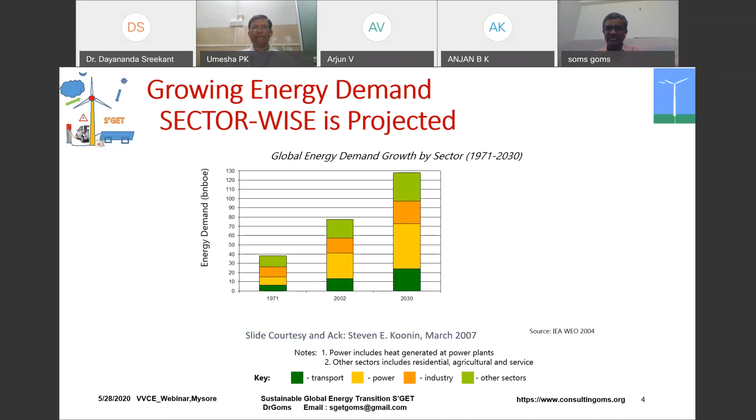Just remember, the CO2 left by your grandfather is still remaining in the air, because the half-life of CO2 is 120 to 150 years. So what we emit will live even after our death. So we have to leave emissions as low as possible.

What are the sources of emission? See the percentage of sources of emission: electricity and heating is a major contributor, 24.6% of emissions. It's an excellent book by Soli Arceivala, who was a world-renowned person, 'Green Technologies for a Better Future,' which vividly covers how we can have green technologies.

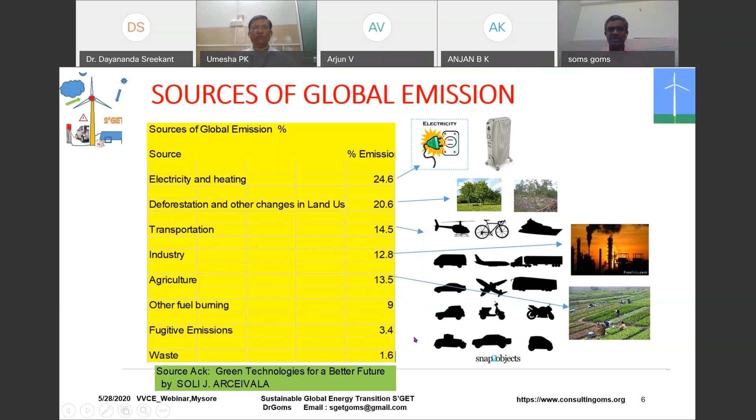Let's look at some emission factors of fossil fuels. Lignite has the highest CO2 emission per megawatt of power, 1.3 tons per megawatt of power from lignite power plants. Coal is 1.05 and so on. Even if you burn wood, it will give you 0.17 kg CO2 per kg of wood burnt.

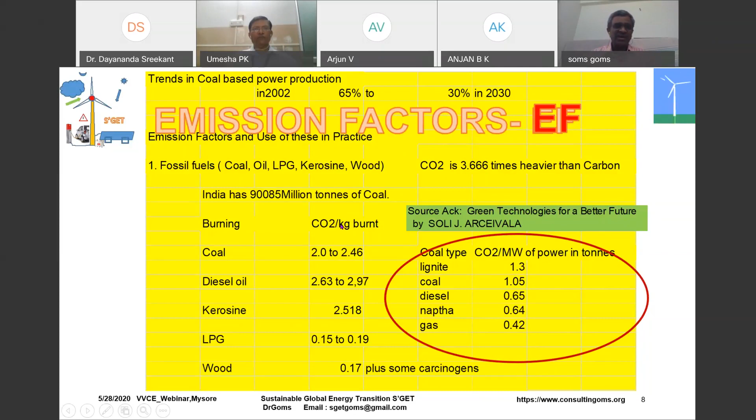Now, how we can reduce emissions: if you drive a two-wheeler, 45 grams per kilometer of CO2; three-wheeler 57; trucks 166; flights 170 to 175. Best is to go by public transportation - train, metro rails and other things - that will give a lower emission level.

Again, for industries, usage of electricity gives you almost 0.37 to 0.48 kg per kilowatt hour - for every unit you put in, the atmosphere gets 0.37 to 0.48 kg of CO2. And in the UK, it's 1 ton of CO2 emission per person per year because it's a developed country. In high income group flats it's about 1.4 tons, which is much more than in other countries - in comparison, it is 0.05.

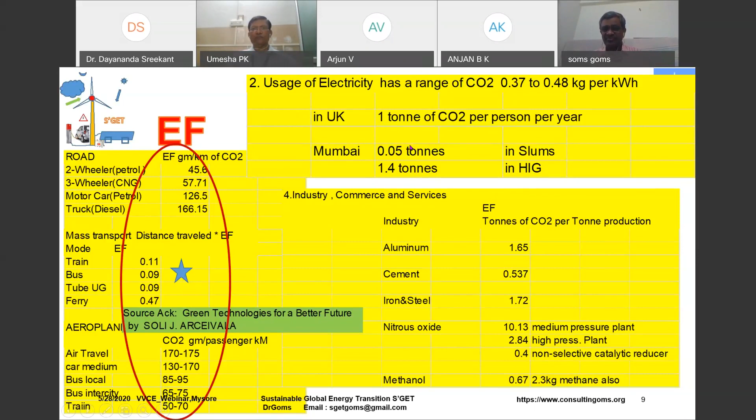Then we have the agricultural soils, bagasse, crop residuals. Everything gives a lot of emission levels.

Burning a human body releases 50 kg of CO2, but it is called carbon neutral because the wood would have consumed that amount of CO2 to produce. When plants are growing, they consume CO2 from the atmosphere and light from the sunlight. So human body burning is supposed to be neutral.

This is just to give you the emission factors. For a tall building like a 31-story building, they have analyzed a case study in this book. It gives almost 738 tons of CO2 per year with only 31 floors, from average electricity, AC flats, LPG usage, car travel, and other common items. If you multiply all this, you can estimate how much carbon dioxide will be put out by a tall building using all these facilities.

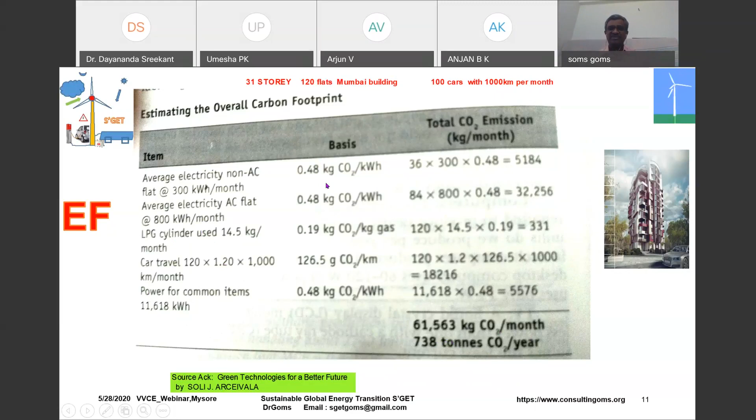That means we are enjoying a lot, right?

The Corona effect is temporary. They say pollution levels have come down by almost a 20-year low today, down to the 2000-year level, because of lower industrial activity, lower transportation, and other things.

But this curve, which is exponential, will immediately pick up after the lockdown scenario. If it is uncontrolled, it will go exponentially, emissions will be uncontrolled, and the parts per million in the atmosphere will also go uncontrolled.

So the other curves are, if we take some early decision to limit the parts per million in the atmosphere, what is the scenario? We need to follow this scenario and avoid the business-as-usual emission levels in the atmosphere.

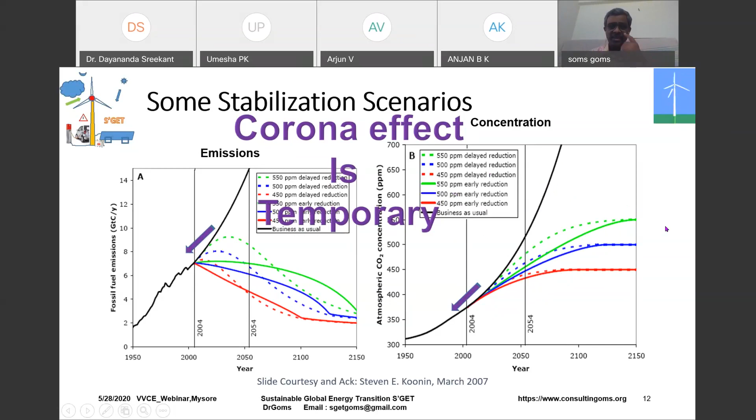Luckily, India, being a developing country, uses very low electricity per capita consumption. Compared to the world, it is 1/3 of the world average. In India, per capita electricity is about 1,170. Per capita CO2 is also lower compared to the world average, and per capita energy in ton equivalent is lower, because it is still a developing country.

We are yet to provide 35% of our people 24/7 power. Almost all villages are electrified, but maybe only with 1 or 2 lights or a couple of houses. It is not enough; 24/7 electricity should be there for all the people.

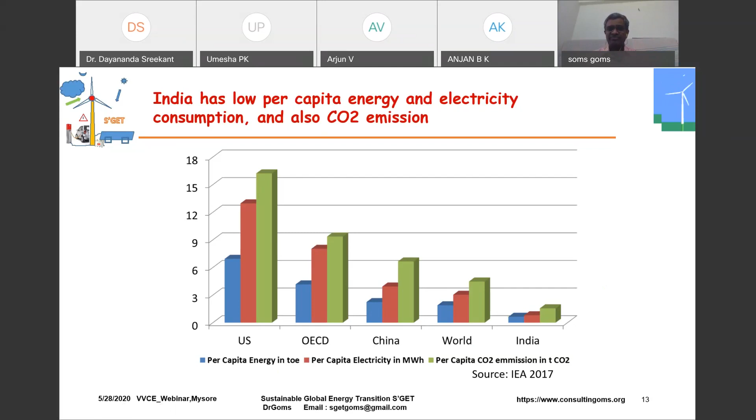In commercial energy demand, India is on the upswing because it's a developing country with a lot of industries growing day by day. Growing electricity demand comes with a lot of challenges, as it's a highly populated country. We are importing 80% of the oil we use, as fossil fuels, and even some coal is being imported. India is yet to achieve universal electricity access for everyone.

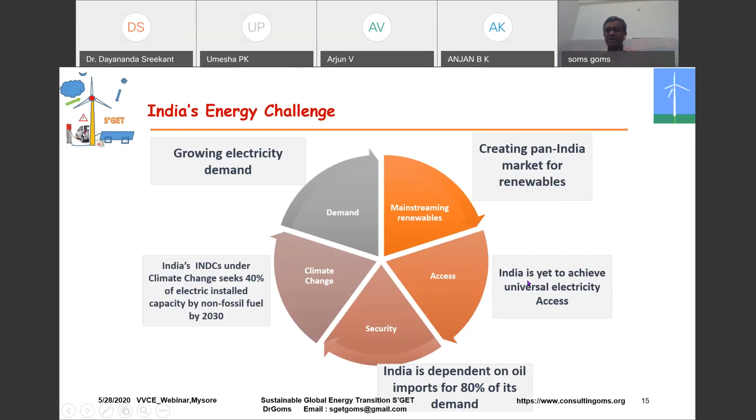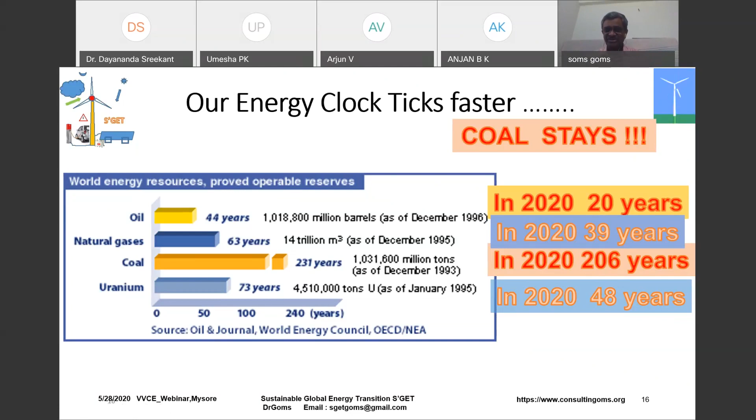It's a highly multidisciplinary area. As engineers and scientists, we will have employability and excellent opportunity, and also inclusive development even in rural areas with renewables.

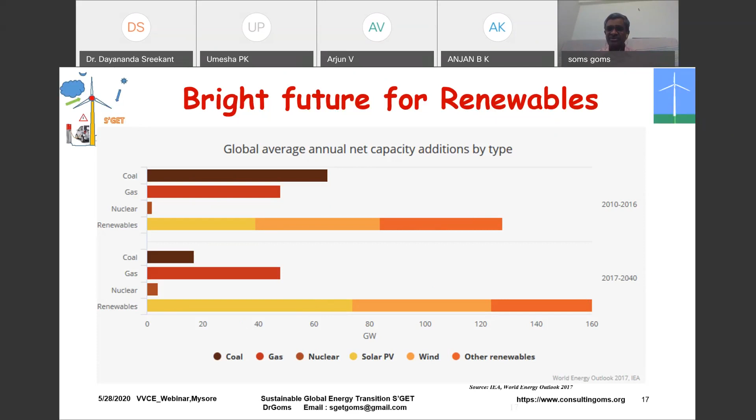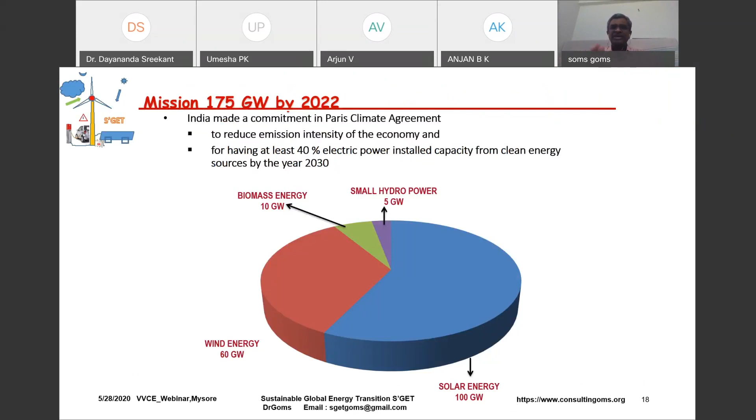This is our ambitious target set by the new government: about 175 gigawatts by 2022 has to be reached. We are almost halfway through - almost 87 gigawatts of renewables are installed in India now.

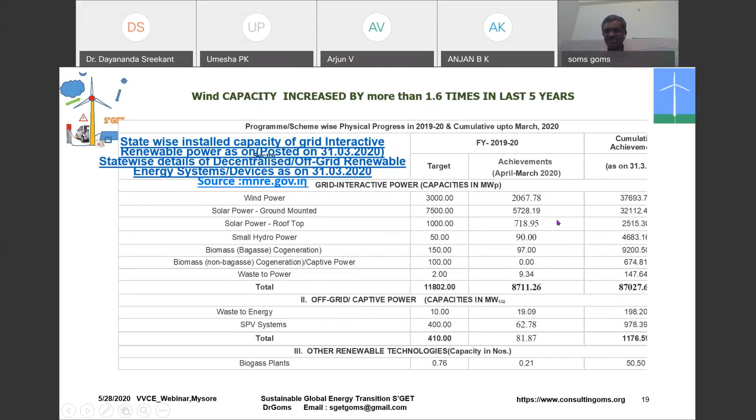So we have been making a path-breaking journey in the renewable space all over the world, not only in India. In the last 5 years, there has been tremendous growth, a compounded annual average growth of almost 15 to 20% in this sector.

Rooftops, hydro hybrids, wind-solar hybrids, large wind farms, nuclear reactors, highly focused concentrated solar power, solar mills, floating solar plants, and biomass plants, and so on.

So achievements so far: our renewable energy capacity has more than doubled. In 2014 we were about 35,000 megawatts. Now it is 87,000 megawatts today, as I showed you in the previous slide.

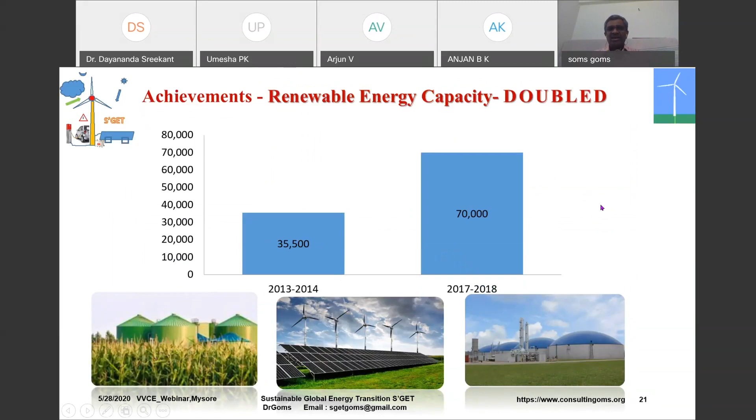We have 32,000 megawatts of solar now, and it is growing day by day. Over 100 billion units of electricity has been generated from renewables and used in day-to-day life.

We have gradually moved from 1.5% of energy penetration, not installed capacity but energy penetration level. Now in 2019, we reached 10%. We have already crossed 10% of energy from renewables in our energy mix, especially electricity.

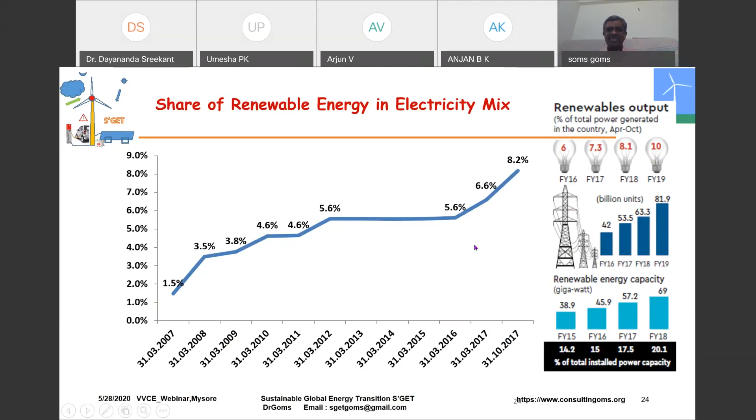Off-grid solar applications are increasing. More than 25 lakh solar pumps and several solar street lights and home lighting systems keep increasing. DC homes, where the grid is not able to penetrate, give solar DC homes; these have also increased to 16 lakhs as of now. Solar lamps about 25 lakhs, solar street lights 6.2 lakhs - this is a slightly older figure, now it will be much more.

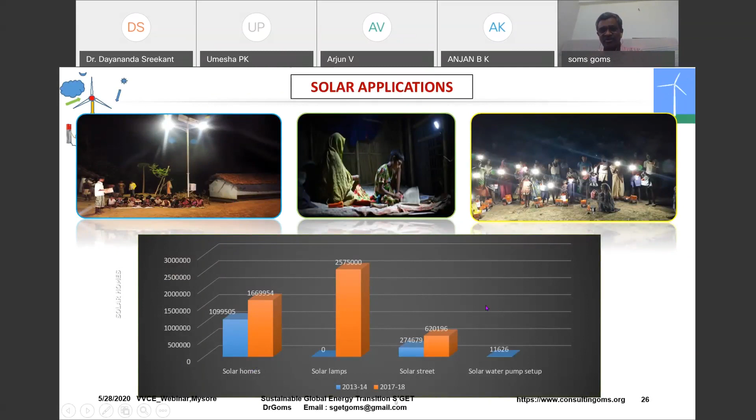The cost of solar is coming down day by day. From 17.91 rupees per unit of electricity from solar when we started in 2010, about 18 rupees, today it has come down to almost 2.44 rupees per unit - this 44 figure is old, now it's 2.41 or 2.43 rupees per unit.

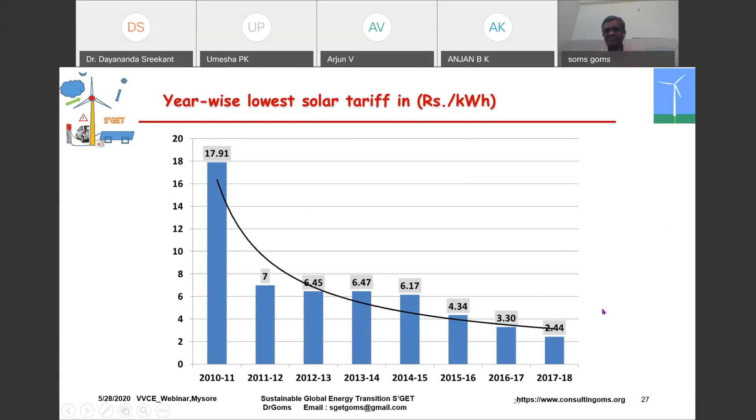There are several reasons: the government push, and several big solar parks have come up. Also the operating cost - the fuel is free. Sun is shining 300 days in a year in India.

In one of the recently attended webinars, Indo-German Energy Forum Director Tobias Winter said, in India, 365 days, somewhere or there will be sunshine. It is a golden opportunity for India to go solar in every aspect.

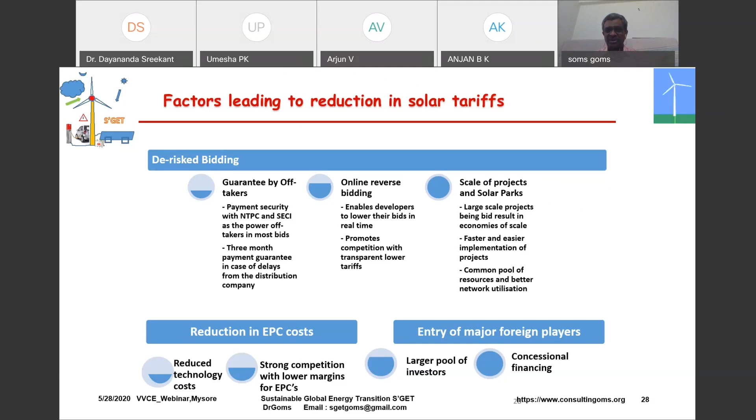Only 2% of solar energy makes the entire wind power in India. Do you believe that? Because that 2% of solar energy, differentially absorbed in the land surface, only causes the air to move from place to place - that is our wind power.

So tremendous solar energy is there. We are yet to use most of it. Most of it gets reflected and goes back to the atmosphere.

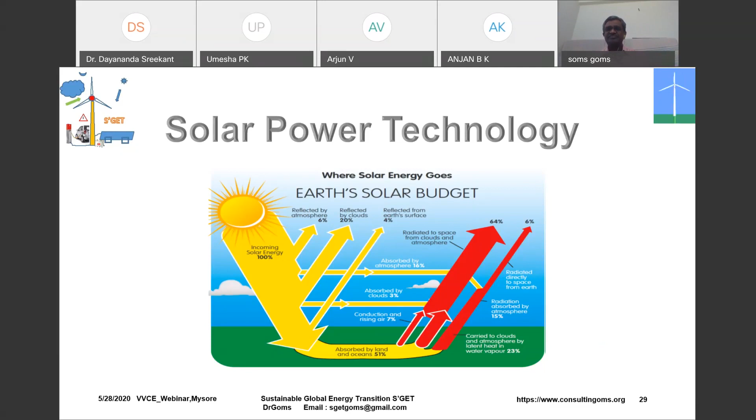The accurate measurement of solar energy has been done by NIWE during my time. The National Solar Atlas has been released with accurate measurement of direct normal irradiation - what is coming directly from the sun - global horizontal irradiation - what is reflected from clouds as well as normal radiation together - then diffused horizontal irradiation, that comes from reflected surfaces, some diffused light even though the direct light is not there. That kind of light also we have energy from.

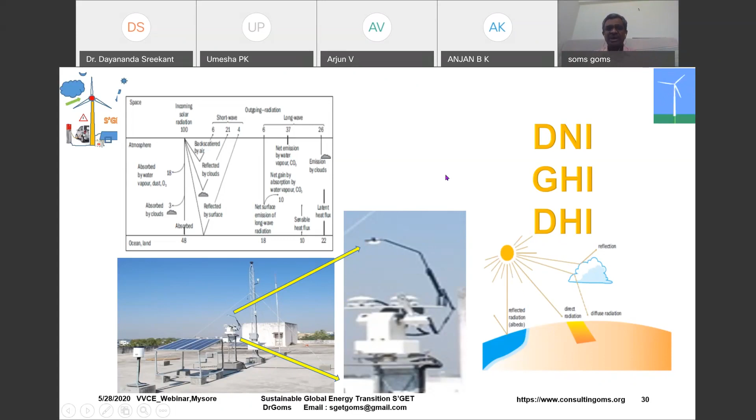This kind of measurement station, each one costing about 36 lakhs, was established - 114 stations all over India - and we released a well-validated solar map for India.

Now it is available in your mobile, in your hand. You can click the SW Urja mobile app, download it, and get all the information on wind potential and solar potential anywhere in India. This was released by NIWE, National Institute of Wind Energy, Chennai.

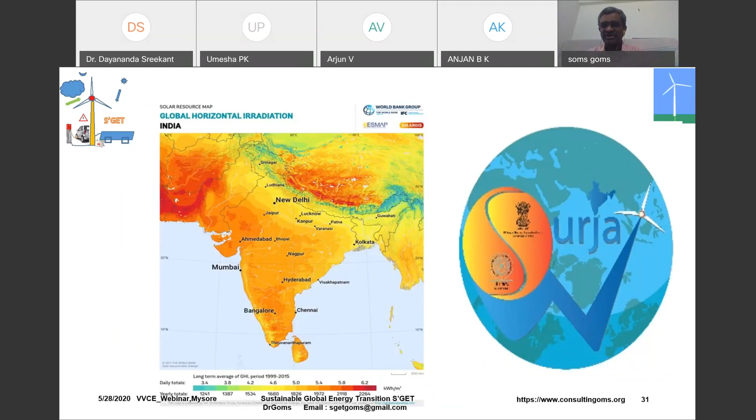Now let's briefly look at the technologies. Even though many of you know, solar photovoltaic develops electricity from sunlight, not from sun's heat. So a solar farm in Rajasthan or Tamil Nadu will be much less efficient than a solar PV plant in Ladakh, because a solar cell is an electronic PN junction.

It will work better in low temperature areas where bright light without pollution is reaching the earth. That will be possible in a dry desert like Ladakh, where temperatures are below zero all the time. This is an important point you have to know: solar photovoltaic only uses light energy to produce electricity.

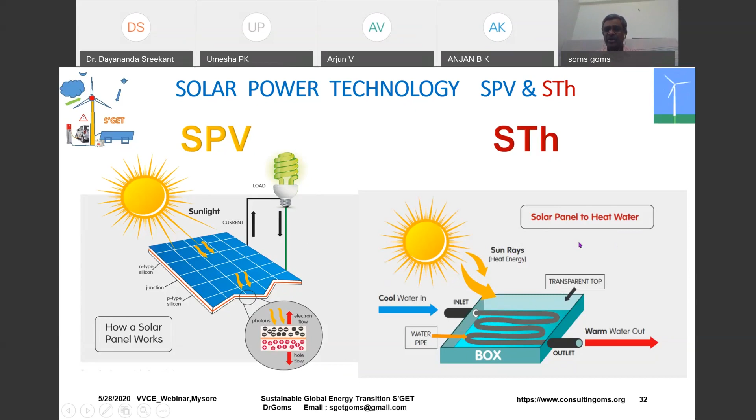Solar thermal is different - we have plenty of heat, we are a tropical country. Bangalore was, I think, the first city to mandate solar panels to heat water as mandatory for building approvals.

What other things can you do with solar thermal? You can make a parabolic reflector concentrated on a single pipe, carrying a fluid that takes up the thermal energy, and that can produce heated steam from 350 degrees to 550 degrees centigrade in this fluid.

If you go further with concentrated solar, you can use molten salt as a carrier for thermal solar energy, reaching up to 600 to 1200 degrees centigrade. A mini solar thermal plant can do several things - generate power, use it for desalination, or other purposes. Mahindra's Pune factory has got a 40-ton air conditioner without using electricity, only using solar thermal.

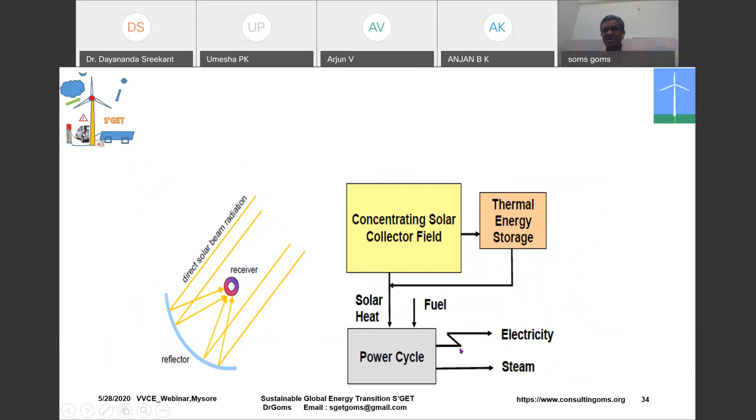This is how it works. There is a receiver, direct beam is focused on here, and the solar heat is used for either electricity or steam, and it can also be used with thermal storage bins. So with solar thermal, heat only is possible for industrial drying of coal, so that better efficiencies are got in thermal plants. Then power only you can generate, or combined heat and power also with this.

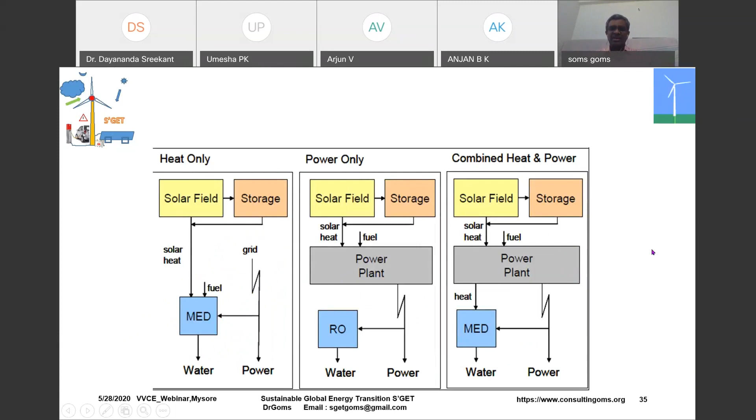Rooftop solar costs are coming down but it is yet to go in a big way. The target set for India was around 40 gigawatts by 2022, but we are unable to meet the target. Only 5.7 gigawatts installed so far, mostly industrial and government sector by compulsory mandate, and commercial establishments wanting to reduce power charges. Residential is only 12 percent now. This has to be boosted because residential has got the biggest advantage.

And you can also use it with a battery. The earlier slide we have seen, the cost of solar electricity was almost 2.4 to 2.43 rupees. If you use a very efficient battery with lithium ion and so on, it will only increase the cost by 4.5 to 5.7 rupees, whereas our electricity charges are much more than that.

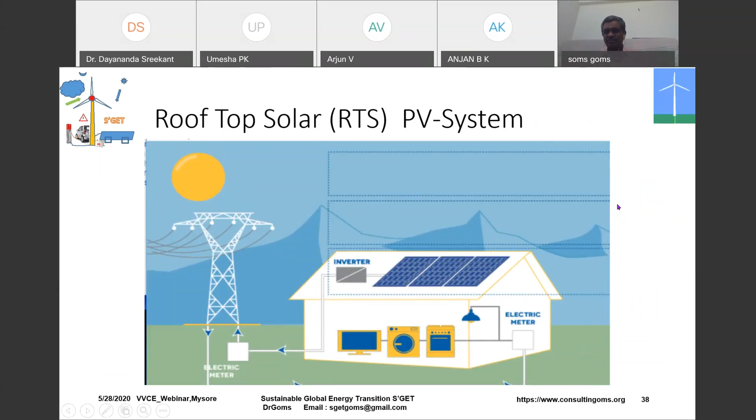So you have the solar panels, inverter, either you use it in-house or export it to the grid. This is the system, solar rooftop system. You see the flow of the electricity here. If it is exported to the grid, you get paid at a nominal rate. And if you are using it yourself, you are saving on the electricity bill charges mandated to be paid to your electricity board.

So it's better when the sun is shining to use your washing machine, your motor, and so on, so that when the sun is not shining, you can take the grid power. That is on-grid applications, and you can combine it with off-grid applications.

Instead of diesel genset, you can very easily replace it with a battery bank or local wind generation. As shown in the initial slide, small wind generators can work even in urban winds, since buildings make air flow around them. Even those winds you can exploit in urban areas.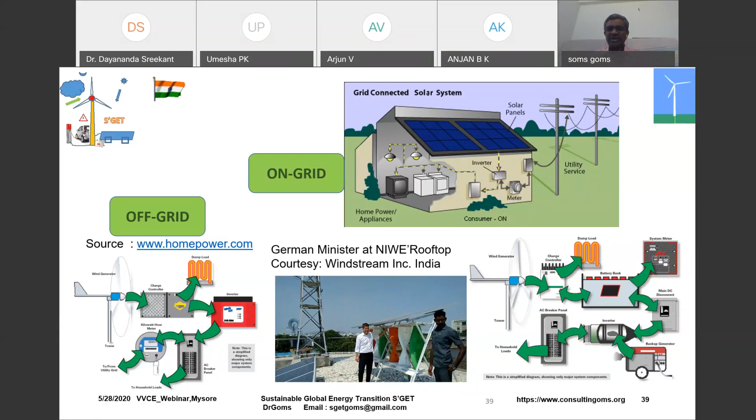Standalone, off-grid, or plus storage. Without storage, we have seen in the previous slide, a charge controller is what is required if you only want to use DC load - DC TV, DC powered fan, brushless fan. Modern DC homes are plenty, installed in India in border areas like Rajasthan, Gujarat, and those areas, powered by DC systems. Or you can use an inverter, convert it to AC load, and use it.

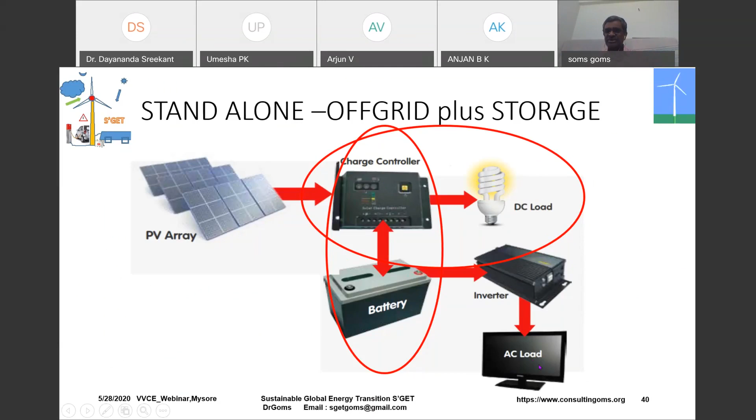You can combine along with solar panels, a DG set, or a battery power bank these days, or even your electric vehicle if you are buying one - that can be used to power your home at night if you have enough extra battery storage in the vehicle.

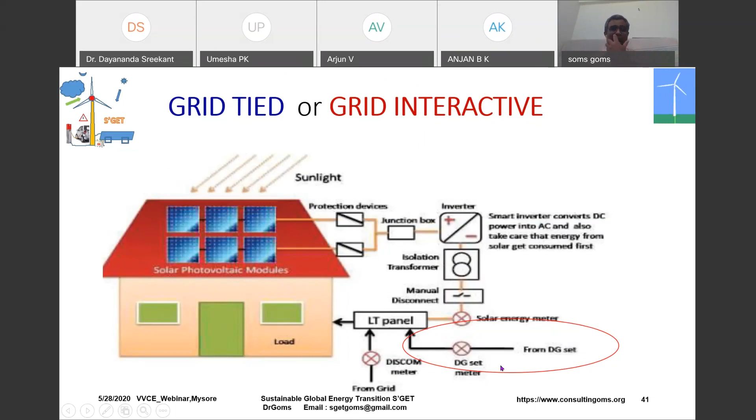Cost reduction of commercial scale-up rooftop solar: the solar modules cost about 28 to 30,000, inverters 8,000 to 10,000 depending on quality, and it is about 50,000 to 60,000 per kilowatt, and that will come down if there is mass deployment. Say 250 kilowatts is deployed in a community or rural village, then the cost can come down by almost one half. So there is cost reduction when you have mass application of rooftop solar per kilowatt.

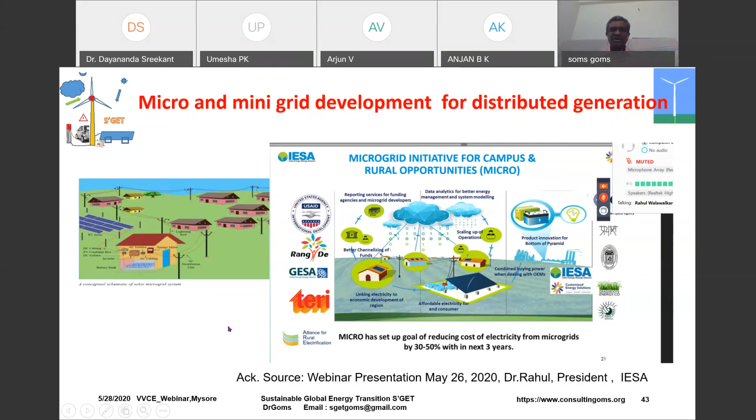If you measure the time history and use an averaging time of 1 hour, or a shorter window like 3 seconds, the 3-second average gives you the gust wind, which is one of the peak winds. If the averaging time increases, it becomes the average wind, that is the hourly wind speed. For dynamically excited structures, we use gust wind to design the structure, while for normal civil structures we use mean hourly wind.

In the animation, there are only 3 concepts. First, the vertical axis wind turbine, like a broken cylinder in the form of a clover or fan, with plates bent in a curved shape rotating about a vertical axis. This is the Darrieus type, with an aerofoil-kind blade that rotates when wind comes from any direction. Then there's the most popular megawatt class wind turbine, the horizontal axis wind turbine, which has upwind rotation.

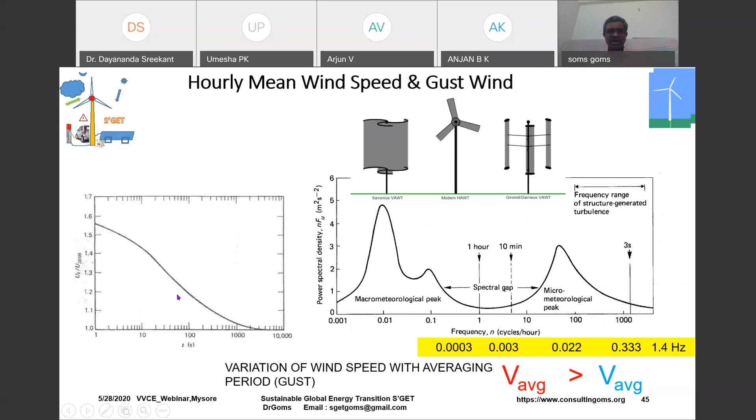Any wind measurement to assess site potential should be averaged over a minimum of 1 hour, because between 1 hour and 10-minute averages the variation is small, whereas a 3-second average gives the gust wind. This graph on the left shows that as averaging time increases, the ratio of gust wind to mean hourly wind keeps reducing, from a factor of about 1.6 down to almost 1, not 0.

On the left hand side, you know how an aircraft takes off from the runway. It picks up very high speed, and a lift force is generated on the aerofoil, the wing. That strong lift force comes from the high speed, around 250 meters per second, generated by burning fuel like gasoline, which is why the aircraft is able to lift off and keep flying.

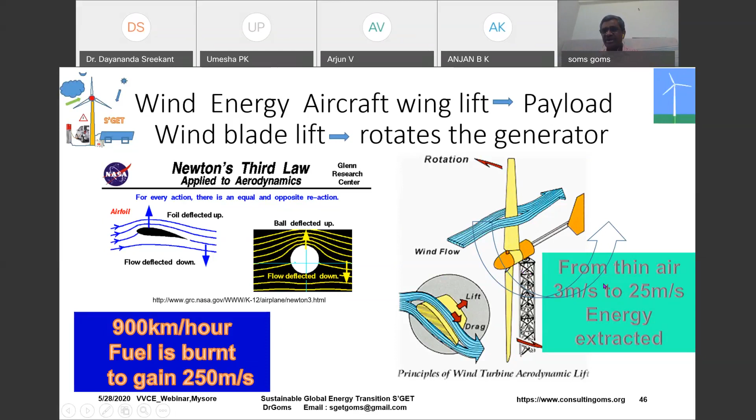In a windmill, the same concept of lift has to be produced perpendicular to the direction of the wind and perpendicular to the aerofoil, so that this lift force and the lever arm to the axis give torque at the center. If you optimize the lift, you generate more power at the center. This is the general, simple principle of how a wind turbine works. But unlike an aircraft, we have to extract energy from thin air, from wind speeds of 3 meters per second up to 25 meters per second. Cyclone winds cannot be used for energy extraction.

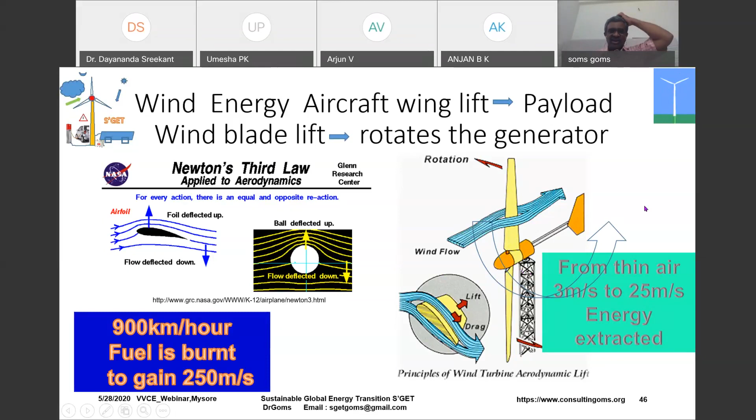Imagine a windmill here with velocity V1 coming from this side. After the windmill, if the velocity became 0, that would mean you captured all the energy from the wind, which is not possible in natural flow. So there is a limit of efficiency called the Betz limit, which is 0.593. Practical wind turbines achieve an efficiency of about 0.4, or 40% of the energy captured from the wind.

Wind velocity versus power generated by the wind turbine is called the power curve. By designing different blade sizes and tower heights, one can design the power output of the wind turbine, giving its characteristic power capacity. But wind is natural, and wind speed is distributed in a frequency: 5 to 6 meters per second occurs most of the year, whereas 15 to 20 meters per second occurs only a few hours of the year. This wind speed distribution combined with the power curve has to be integrated to get what is known as the annual energy production from the wind power machine.

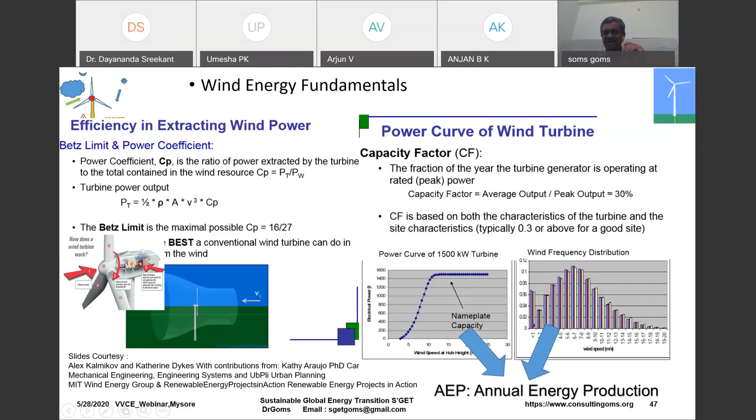It is clear in a simple way. You have to use a human-designed power curve of the wind turbine and use the natural frequency, wind speed frequency distribution at the specific site where the wind turbine is going to be installed, and get the energy transformation. You have a lot of opportunities in technology.

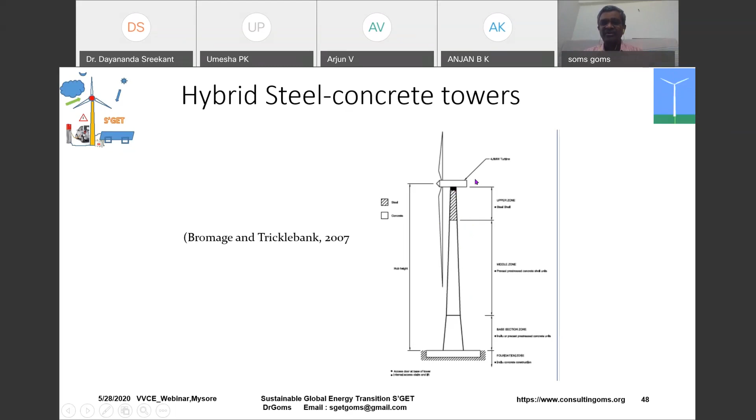We have pre-stressed concrete, hybrid steel and concrete towers. Only this part is steel. We have built in India 270 meter tall chimneys. Why not build concrete wind turbine towers even in forest areas? Because you don't need to cut trees to take jelly and sand to any point in the forest. You build up a tower and then use a small segment of steel to erect the final wind turbine. This can again be pre-stressed concrete tower, circumferentially pre-stressed, longitudinally pre-tensioned, post-tensioned concrete tower. These all exist in the world, not myths in theses or reports.

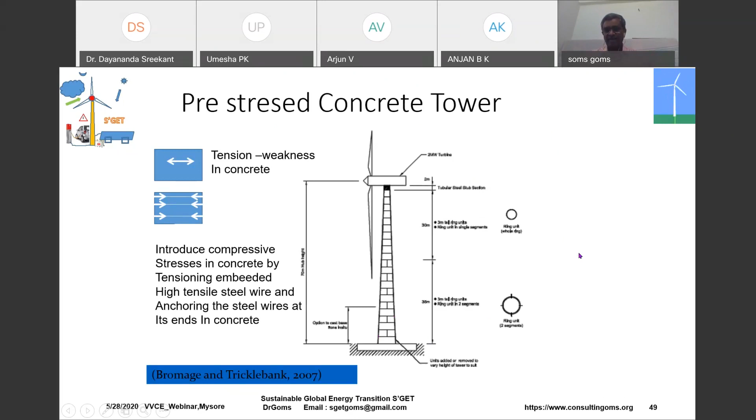Then we have offshore wind energy that is picking up in a big way. In Europe, US and UK, it's slowly moving to offshore, because in UK, land-based wind turbine power is costlier than offshore wind turbine power, since land is so scarce in UK. So they use more than almost 5,000 megawatts of installed capacity of windmills located offshore in UK.

Offshore wind turbines are slightly different compared to onshore wind turbines. For onshore wind turbines, the cost of the equipment is 65% of the total project cost. Whereas for offshore wind turbines, the cost of the EPC, piles, supporting structures, erection, and commissioning in very troubled atmospheric weather conditions is almost 65%, and only 35% is the cost of the machine itself. So that's completely reverse in the case of offshore wind turbines.

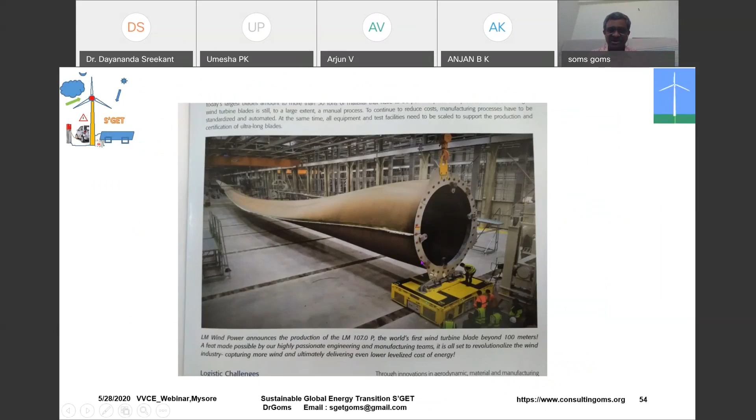This is again a closer look at a blade which is 107 meters, produced recently, and the towers for that, supporting towers, are transported and erected. It's a hybrid tower with steel and concrete, steel cylinder there. Tower heights are slowly increasing. They are predicting 10 megawatt, 12 megawatt, and 14 megawatts we have already reached now. This is going to be a commercial market in 2024-25 soon.

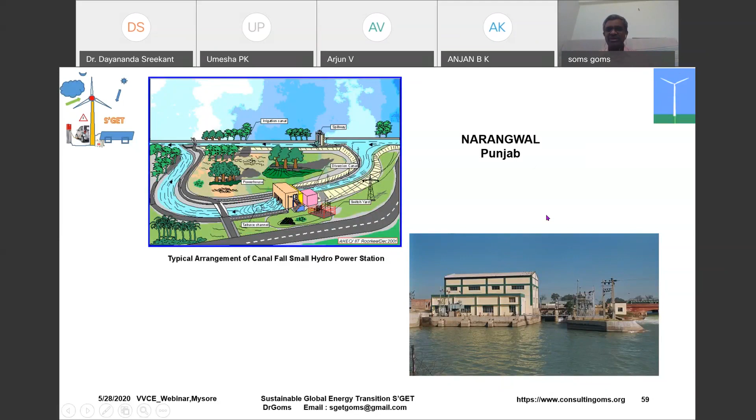Also in canals which are flowing very fast, when they are releasing the shutter, there's a good speed that can also be used, in Punjab. This is a small hydro. At a dam toe, when the shutter is released or water falls down on top, there's a gushing of water, and the extra high speed of the water flow can also be used. This is in Madhya Pradesh.

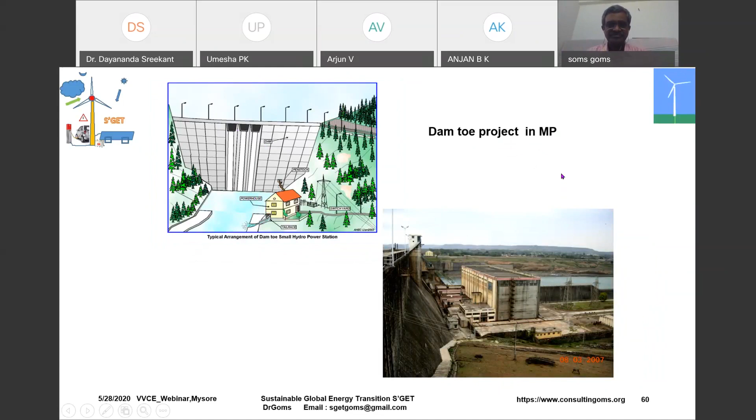Then biogas for cooking is not new. I think Karnataka is doing excellent work. There's a demonstrative biomass plant, I think somewhere close to Bangalore. I forgot, I have visited. Now there are 2.5 lakh biogas plants set up in the last 4 years.

And solid waste dumps stink. Why does it stink? That is 0.42 grams per person per day of normal waste release. 10 lakh people release almost 420 kg per day and 153 tons per year. Methane, which gets generated in these dump yards, just escapes to the atmosphere. That is why it stinks. If you capture this through bored pipes, suck it through the pipes and store it in containers, methane can be an excellent fuel - waste to energy.

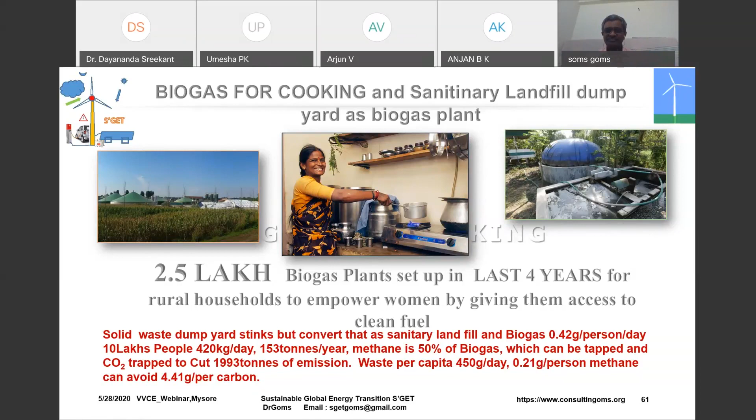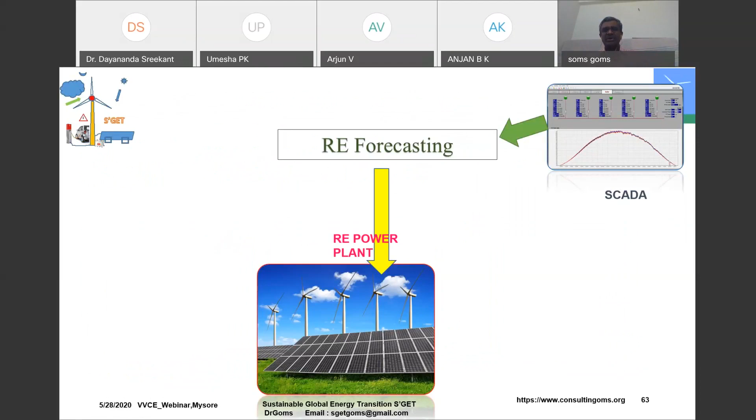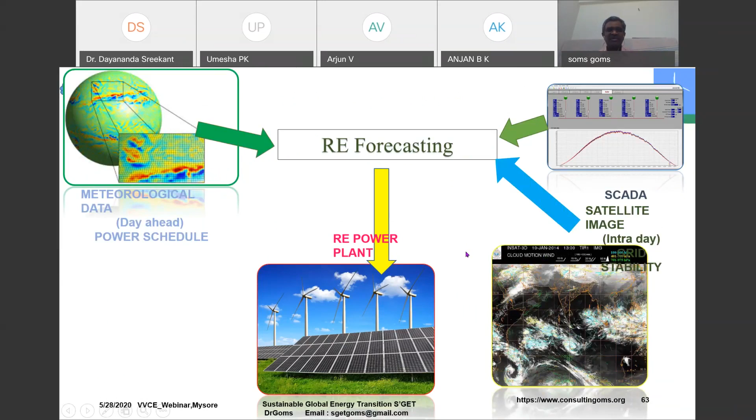Renewable energy has generated excellent employment in the rural sector. Many people say when the sun is not there or when the wind is not there, you cannot have the power. But renewable energy forecasting has reached a very highly matured level. Day ahead forecasting can be given with excellent accuracy, within 5% accuracy, so that thermal plants can be very well managed along with the renewable penetration.

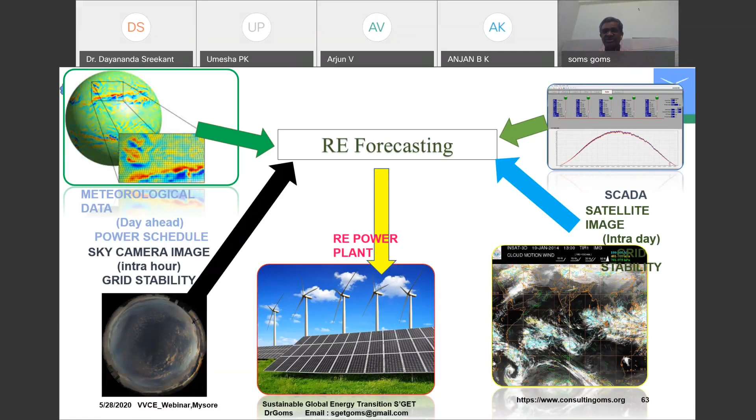In India, Tamil Nadu has got the highest penetration of renewable energy. Almost 35 to 40% of the energy comes from, especially in the windy months of May to September, both solar energy as well as wind energy together, almost 35% of the used electricity in Tamil Nadu. That's become possible because of the excellent accuracy of forecasting.

Intra-day forecast, day ahead forecast given the previous night at 7 p.m., is quite accurate. Weekly forecast will be less accurate, and seasonal forecast will also be less accurate. This day ahead and intra-day forecast can be quite accurate, and you can very well manage the hydro generation as well as thermal generation.

In smart buildings, we will have home energy managers, automatic switching off of AC. A solar photovoltaic system of 3 kilowatt to 4 kilowatt is enough to power many of those controls which you will be using in your house.

A very important thing is, where you produce electricity, there is no transmission and line losses. And if you don't use electricity, you can very easily give it to the grid so that others can use it.

Then geothermal energy: if you dig into the earth, there is a lot of heat energy after some depth. This is not available in every point, but you can send water to that level and steam can be generated. That steam can be used for house heating, as well as you can use it for power production.

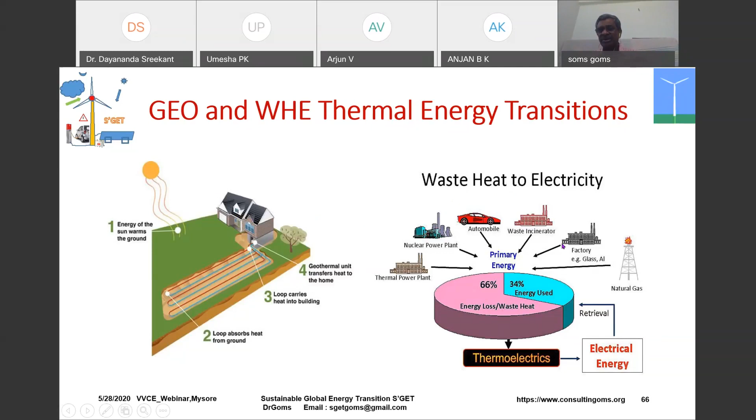Waste heat also can be converted into electricity. Industrial waste heat can be converted to electricity by recovering the heat with thermoelectrics.

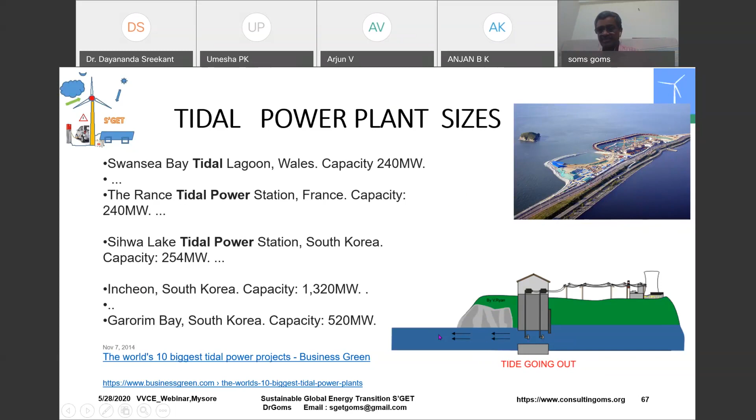Tidal power plants - I am showing what is available in the world. India does not have many. It requires a specific geographical location and good tidal height. As the high tide comes, the water comes into the dam, and when the low tide comes and the water is shut down, this can generate power both when the high tide enters and when the low tide water goes out. On location in the Gulf of Kutch, there's a potential. It's being studied for quite so many years by several national institutions, but it is yet to become a reality.

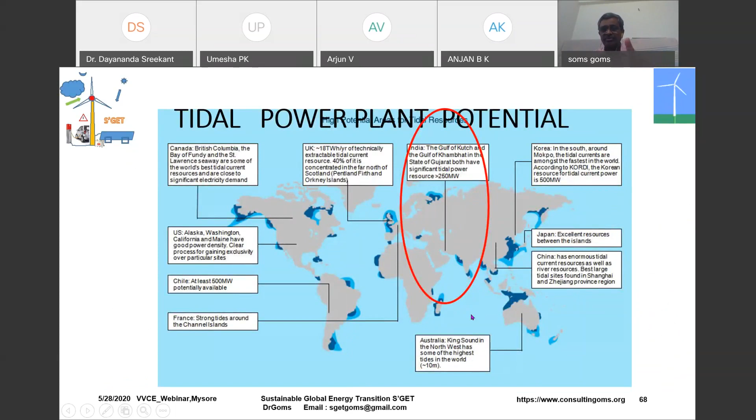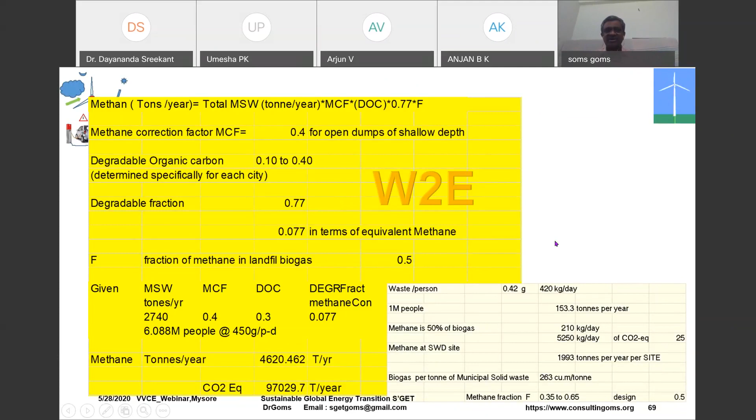Methane is also getting released from paddy fields, and we have methane emission from dump yards, called landfill biogas. This can be filtered using simple suction, and this can be used as pipelined gas, methane gas, for domestic as well as industrial purposes, as well as for power generation.

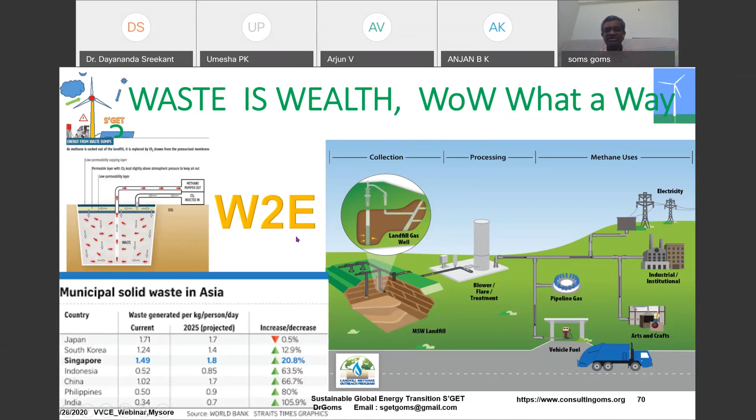India is having excellent waste generated per kg per person per day. India is on the very high side, 105.9%. We can definitely use this by 2025. This waste can be used - waste is wealth, because God has not created anything as waste. Waste to energy is very much possible. If there is a will, there is a way.

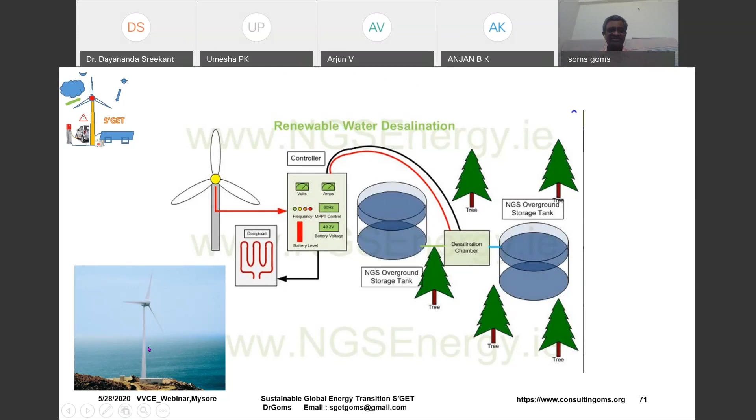And virtual net metering - net metering is one concept, but in most states net metering has now been getting avoided. The concept of net metering is: if you are producing solar power in your house and exporting to the grid, whatever you export can be reduced from your bill at the same rate. But now with gross metering, what you export to the grid will be paid at a rate fixed by the regulatory commission, and what you use in the house will be billed like any other customer.

How to optimize using solar? That's why I said earlier, you use your high energy consuming machines like grinder, washing machine, motors, pumping during daytime when the sun shines, so that you don't export the energy which you are generating to the grid. Then you will reduce your bill.

A virtual power plant, you can think of with a smart computer controlled, digital network controlled grid. You can have wind power, photovoltaic, vehicle to power the grid, vehicle to power, battery swap stations, micro turbines, fuel cell, all other things can be used in the location.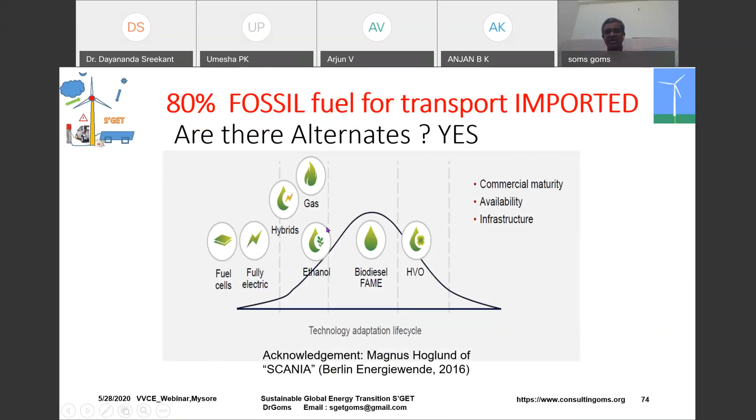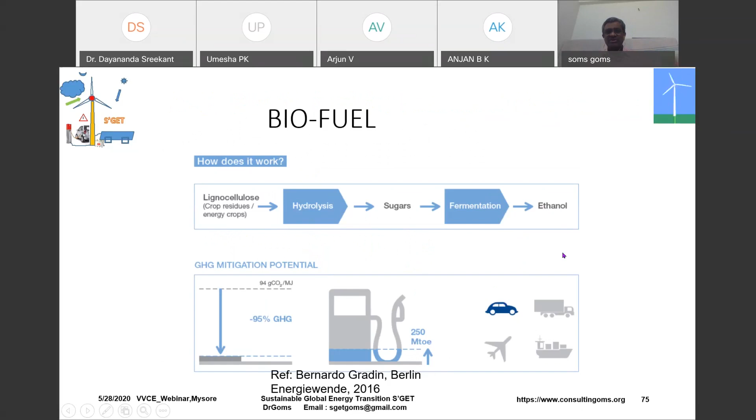There are alternate fuels, fossil fuel, transport imported fuels. There are several types of fuels possible. Ethanol is now allowed to be blended, and biofuel, if you use it, you can reduce the carbon emission significantly by blending ethanol.

First generation is from oil crops, palm and rapeseed oil. This is called first generation biofuel, ethanol to diesel. Second generation uses crop residues, wood residues and waste. Third generation will be microalgae, and that will become diesel. That will be third generation biofuels.

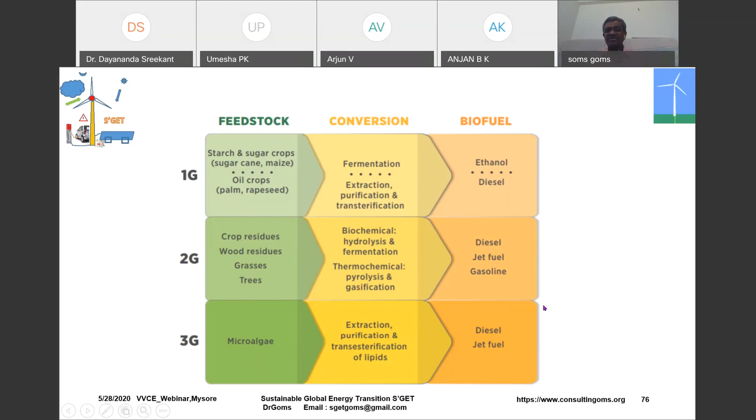E-vehicles are very common in UK and Sweden especially. When you are working in the office, you can charge with renewable power, then it will become cheaper. And establishing charging stations in rural and urban areas is cheaper than establishing a petrol bunk.

For level 1 charging, low level charging, it's 30,000. Level 2 charging for two-wheelers, up to 6.6 kilowatt, it's about 3 lakhs. And fast charging, if you want to have that, it's 15 lakhs. So it is cheaper than establishing a petrol bunk. We need to establish with renewables these charging or battery swapping stations for our future electric vehicles.

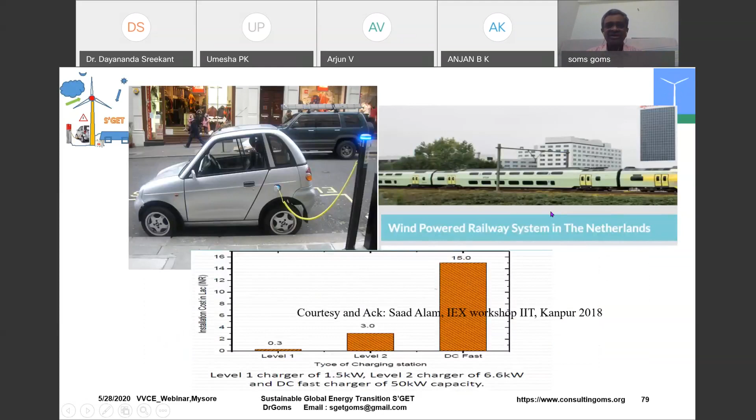Smart grid integrates all the renewables and other conventional power, and intelligently manages what is the demand and generate the demand.

And the fuel cell, the concept is simple. It takes oxygen from the atmosphere and hydrogen from a storage and produces energy which can be used, and the exhaust is good water. By just remineralizing, you can use it for drinking also. So the advantage of the fuel cell, the output is not CO2, it is drinking water.

You can just remineralize it and make it potable water. This website will give you a lot of information about fuel cells.

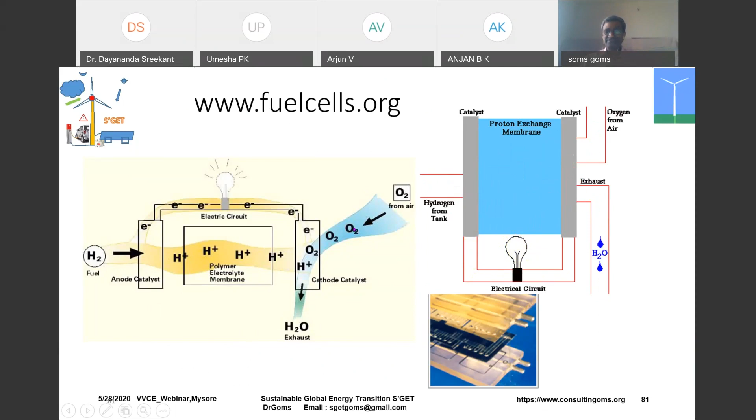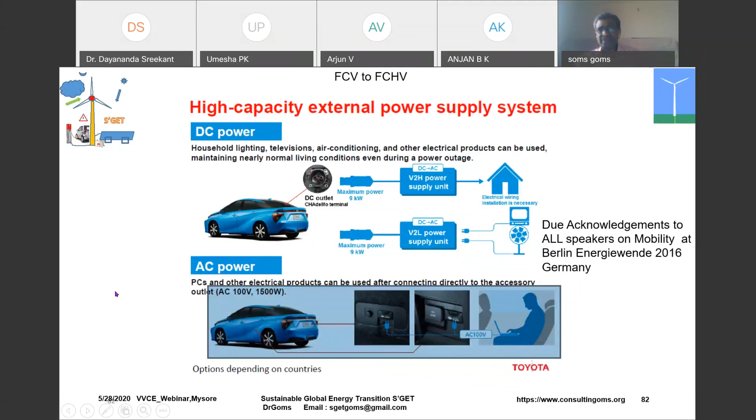Toyota has concentrated on hydrogen vehicles as well as DC powered vehicles, and they waived the patent cost. You can charge like petrol, like a conventional car. Within 3 to 5 minutes, you can refuel your hydrogen powered car, and they give you the technology to set up a hydrogen station free of cost. They were giving it free of cost in 2016, now it may be charging. So refuel and go 550 kilometers.

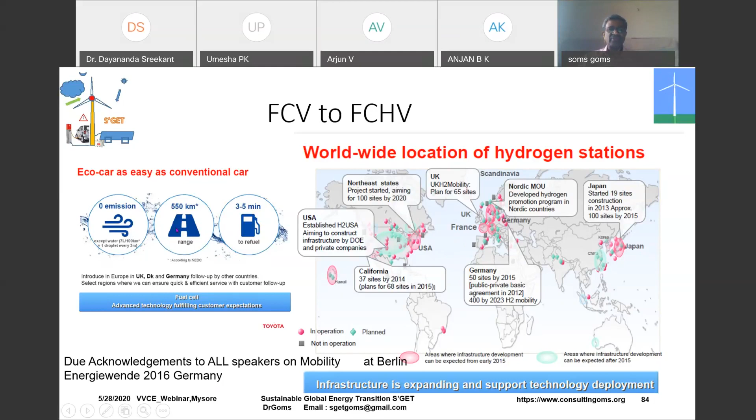Hydrogen production can be from many sources, from coal, natural gas, biomass, renewable energy, just water cracking with renewable energy can also produce hydrogen. So many processes can give you hydrogen. Only thing is the hydrogen has to be transported properly, stored properly, and used as a fuel cell car, fuel cell vehicle, or fuel cell hydrogen vehicle.

Basically, what we are looking at is the mindset change to use alternative fuel for automobiles. That is required, and it will soon happen, so that we leave a greener world to our grandchildren and children, ensuring sustainability and inclusive development, including job opportunities, earning opportunities, and several local materials can be used for these kinds of renewable energy systems.

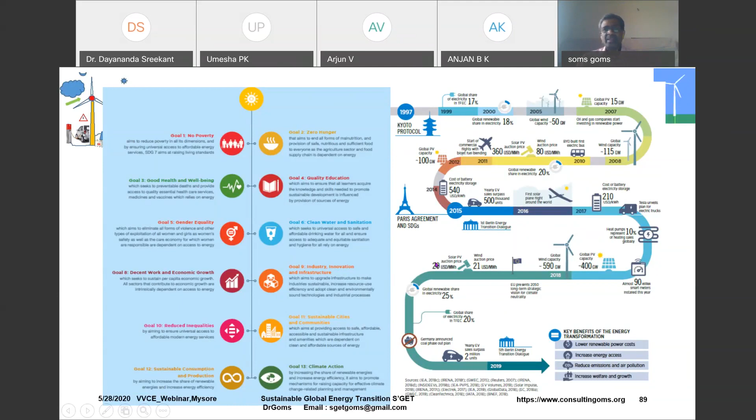We have the renewable energy sector, power generation. We have good progress, and of course solar is going in a big way. Wind is slightly behind; it has to be pushed up by promises, and electric vehicles are yet to take off in a big way in India. These are other technologies for renewables.

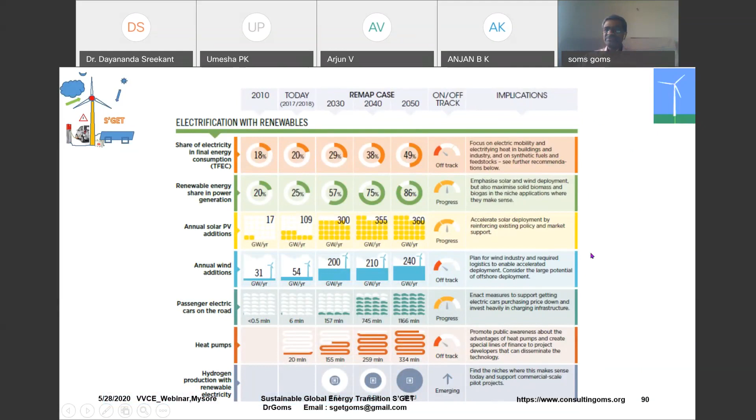India is in fast track growth along with China, with an 11% growth rate in the Indian renewable sector. Wind and solar, everything, the growth rate is quite significant compared to other countries. India and China share the same growth rate in the renewable sector. These are big markets in the world.

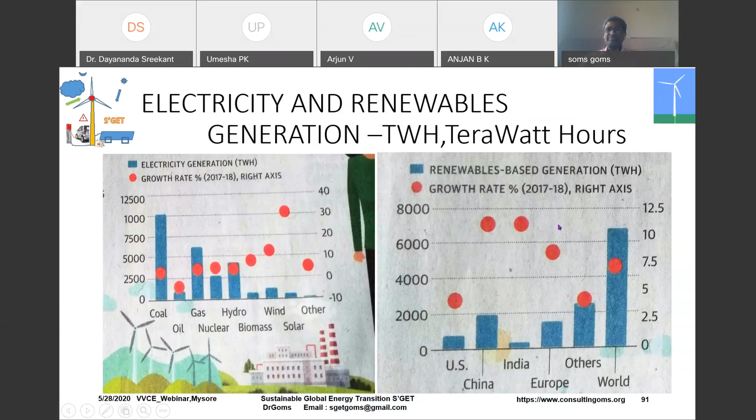Electricity penetration has to be 86% of power from renewables, meaning 56% of the energy should come from renewables. This is a goal. You have to use public transport, and avoid a single person driving a single car.

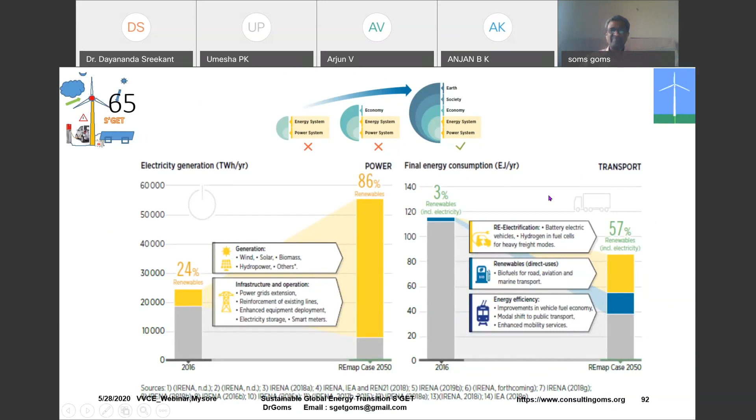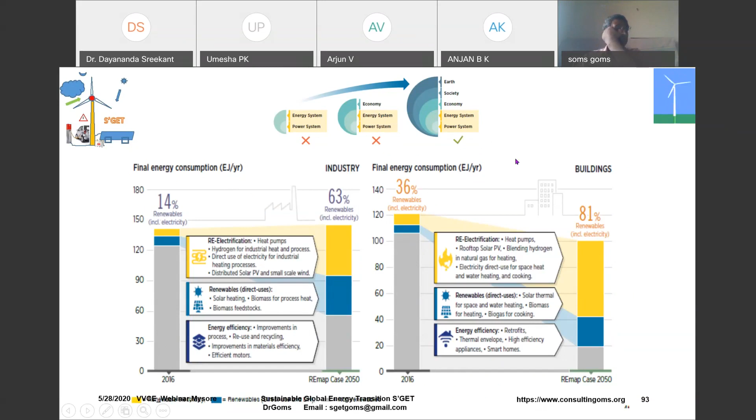One important thing is, today's scenario is not only about system and energy conservation efficiency, it's also about economy, and next to economy, society and mother earth are very important. Environment, energy and environment is important. We are facing it already. Corona has brought down the pollution so much, because so much we have been polluting. We have to reduce this further.

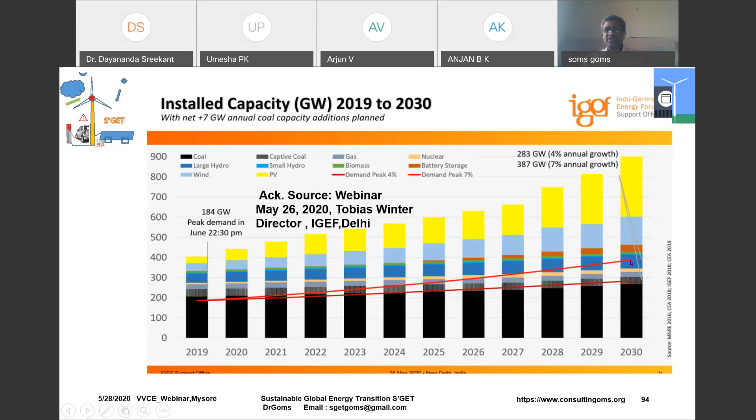You can also think of a zero energy building. This is in Kilpauk, right in the middle of Chennai city. One person has put up a system where he's not using any energy from the grid. He is not dumping any waste. He has got a biogas plant he uses in the kitchen. He has got a 3 kilowatt solar setup at 1.8 lakhs, and he is using it for the entire power use.

He is also using the latest addition - drinking water from atmospheric humidity - at the cost of 40,000 rupees. This is also added in his house. He's called the solar man. If you just type Solar Suresh in Google, you will get a lot of details about him. His house is in Kilpauk, right in the middle of a busy city like Chennai.

What we can do to save the society, the future generation - we have enjoyed, but our CO2 will remain for 120 to 150 years, so emit less.

Renewables play a vital role in sustainable global energy transition, which is my passion. Shine and heat and cool with solar; with wind, onshore, offshore, sea and land breeze can also be used with small wind turbines, which I have shown you. Think small, do, and get it done by the mass.